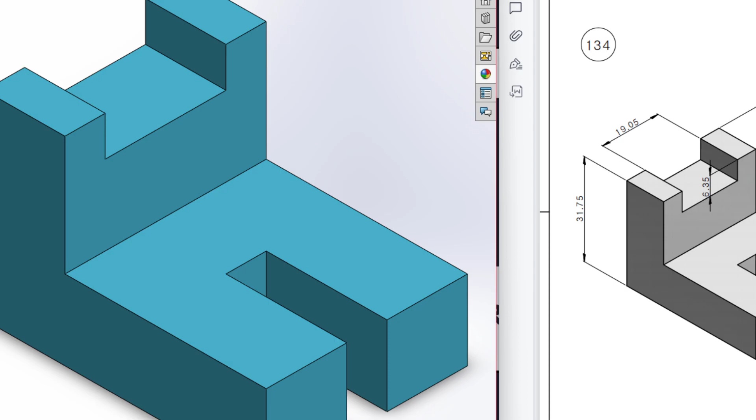Today we are going to solve this 3D problem. In this 3D problem, this is the isometric view and all the dimensions are given in the isometric view. So first of all, in the front plane, I will draw this L shape. In this L shape, we can see this vertical dimension is 31.75 units and this horizontal dimension is 12.7 units. And for this vertical dimension, we first need to find this horizontal and this vertical dimension.

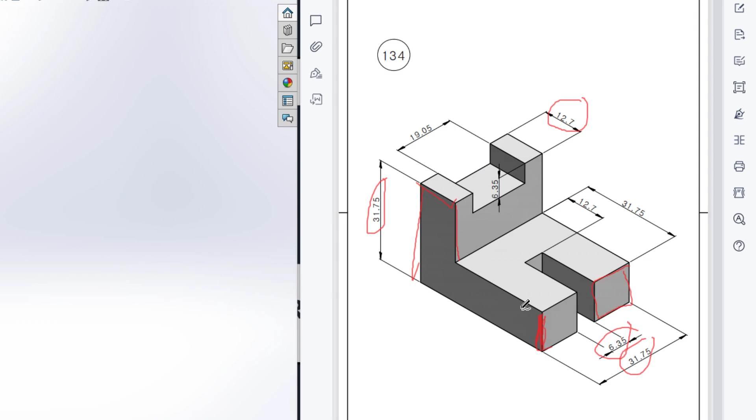For finding this vertical dimension, we can see these shapes are like squares. So this vertical dimension will be 31.75 minus 6.35 divided by 2, and then we will subtract this extra portion from here. Then we have this horizontal shape, and it has a dimension of 31.75. Then I will close the shape. Then I will extrude boss it to 31.75 units.

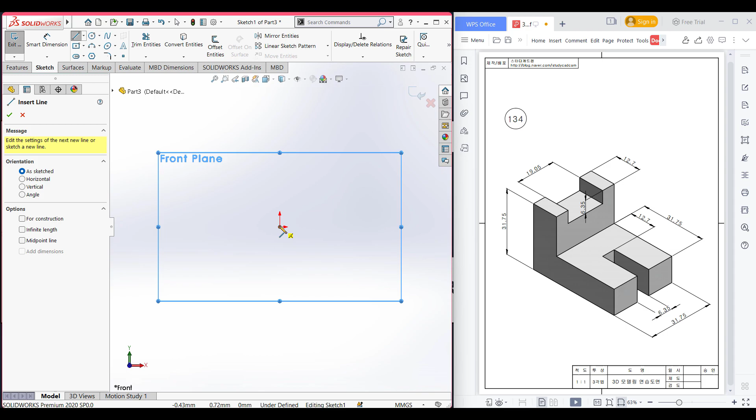So select the front plane, now sketch, now select line and draw a vertical line, and this vertical line has a dimension of 31.75 units. After that, draw a horizontal line, and this horizontal line has a dimension of 12.7 units. Now it's time for drawing another vertical line, and for drawing this vertical line, first of all

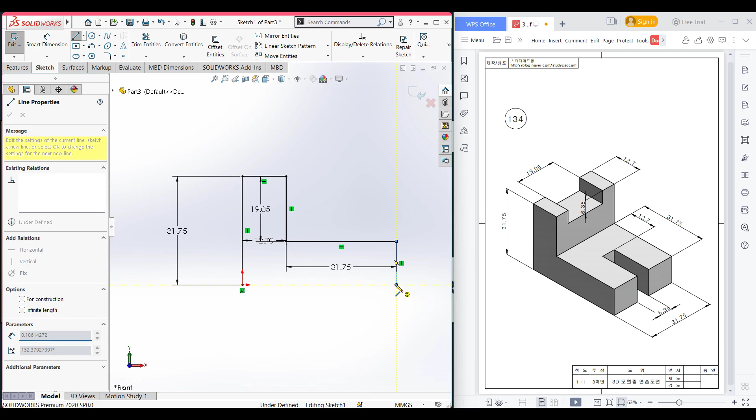31.75 units minus, now give a bracket, 31.75 minus 6.35. Now close the bracket. Now divide by 2, so it will give 19.05 units. Now we need to give this horizontal dimension, and this horizontal dimension is 31.75 units. Now close the shape. Okay, now isometric it for a better view.

Now go to features, now extrude boss. Now extrude boss it to 31.75 units. Now select mid plane. Now press OK. So after that, we can see we have a rectangular extrude cut here.

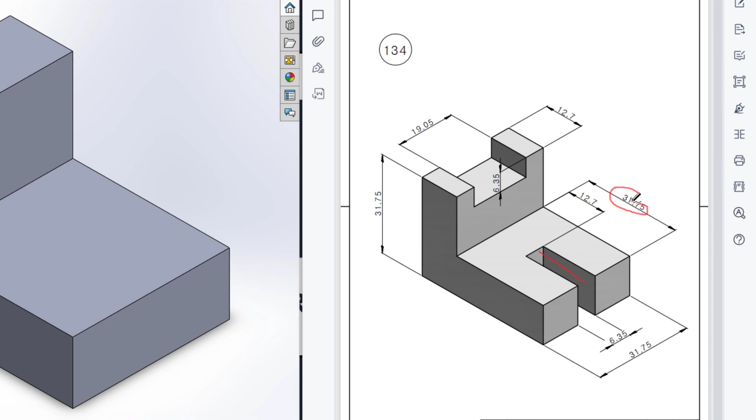And for drawing this rectangular extrude cut, first I will draw a center line here, and this center line has a dimension of 31.75 minus 12.7. Then I will use offset entities to offset this shape, and the total offset will be 6.35. Then I will extrude cut here. Okay, so I'm selecting this face.

Now sketch, now normal to it, and after that select the center line option, place the center line here and draw a center line of 31.75 minus 12.7 units, so it will be 19.05. After that, select this line and draw an offset line, and this offset has a total dimension of 6.35. So the half dimension will be 6.35 divided by 2 units.

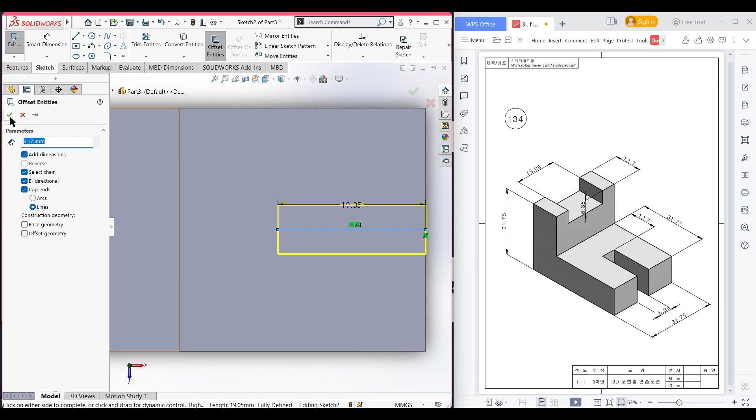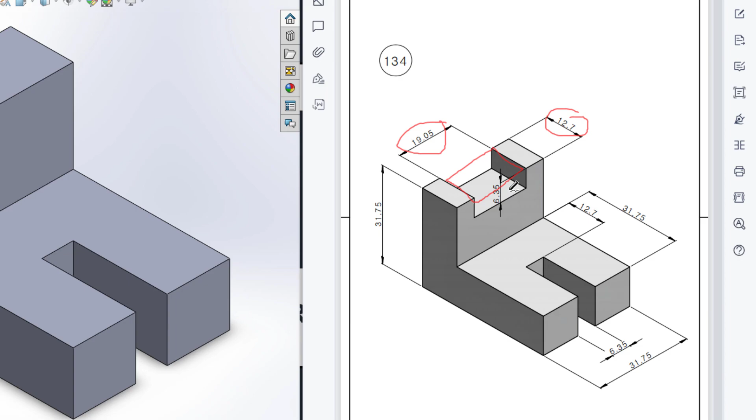So make sure to check this box. Now press OK. Now isometric it for a better view. Now go to features, and now extrude cut. Now press OK. Now it's time for this top face extrude cut, and for extrude cutting this we have a rectangle of 19.05 by 12.7. Then I will extrude cut it to 6.35 units.

For doing this, I will first select this face, now sketch, now normal to it, now select the center rectangle. As the center rectangle will be at the center, I am hovering the mouse here, and also over this midline, so we can see the dotted line, and after this dotted line is coincident, draw the

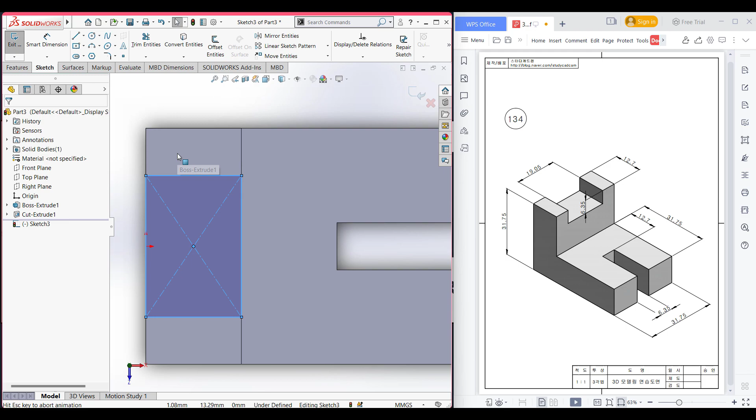center rectangle, and now the vertical dimension is 19.05 units, and the horizontal dimension will be 12.7 units. In this way you don't need to dimension it from the center; it will be centered automatically. So press OK. Now isometric it for a better view. Now go to features, and now extrude cut. Now extrude cut it to 6.35 units. Now press OK. So as you can see, we have drawn our 3D model.